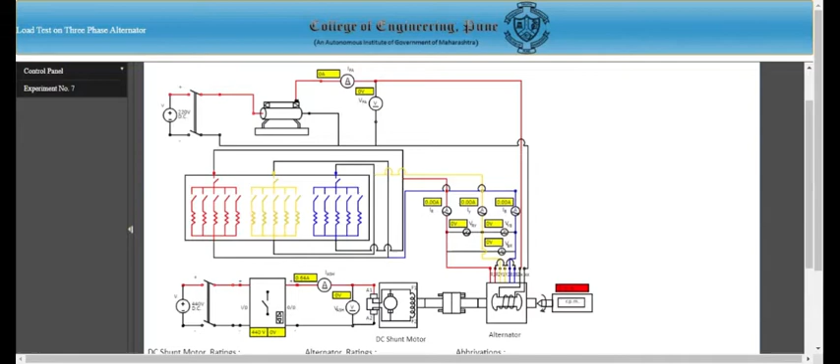This is the DC excitation system. There are two power supplies, one in the DC excitation system and another in the DC shunt motor. There is a rheostat to provide the field current to the rotor, and this is the DC ammeter and voltmeter to measure the field current and field voltage of the alternator. This is the AC ammeter and AC voltmeter to measure the line current and line voltage of the alternator, and this is the DC ammeter and voltmeter to measure the armature current and armature voltage of the DC shunt motor.

This is a setup of the resistive loads. So the first step is to close the double pole single throw switch connected to the DC shunt motor, and the power supply is used to increase the armature voltage of the DC shunt motor. The value of the armature voltage is increased gradually.

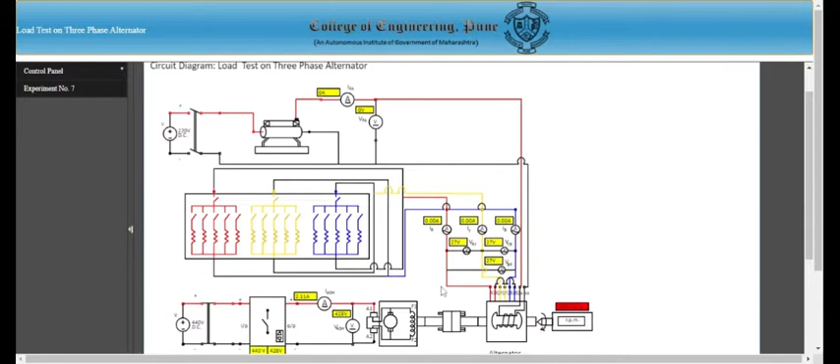After the desired speed is achieved, the DC excitation to the synchronous generator must be turned on. Before that, if we notice the voltmeter connected to the alternator to measure the line voltage, it measures a value of 27 volts instead of 0 volts. This 27 volts is due to the residual magnetism present inside the alternator.

So in the rotor field circuit, by using an external DC supply, the field winding is excited. A rheostat is connected in series with the field winding to control the flux, that is the current in the field winding. First, the double pole double throw switch is closed and the power supply is given to the rheostat.

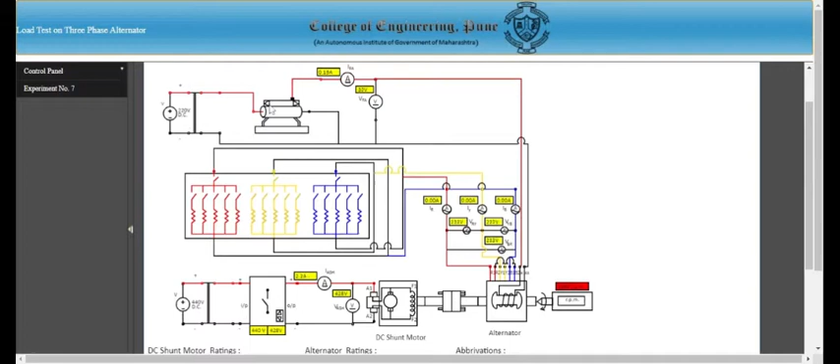After giving the DC supply to the field winding, the field current is adjusted in order to adjust the flux, so that the rated value of the terminal voltage of the alternator is attained. The value of the resistance is cut down to increase the value of the field current, because resistance is inversely proportional to current. The alternator rating of terminal voltage is 415 volts.

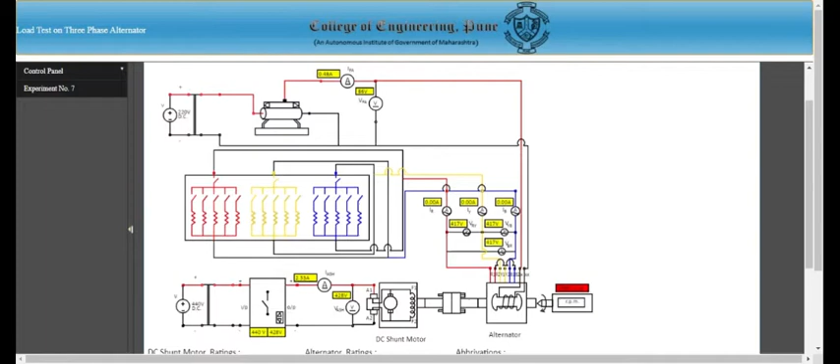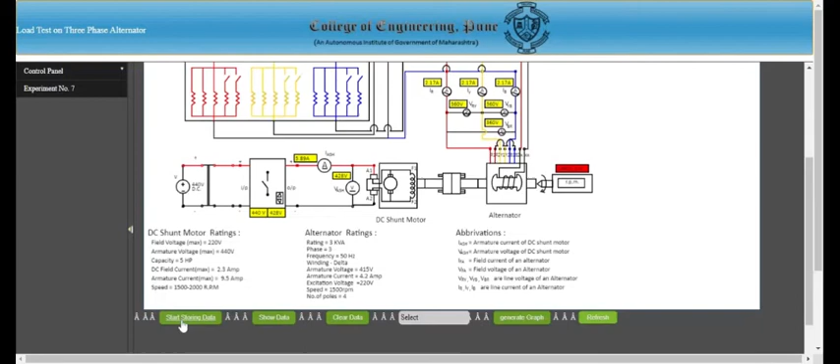Now DC excitation will be held constant throughout the experimentation. So to test the machine on load, we'll be applying loads from the resistive load bank. Each load, when applied, the data will be stored here. As we go on increasing the load, the terminal voltage of the three-phase alternator and the speed will also reduce.

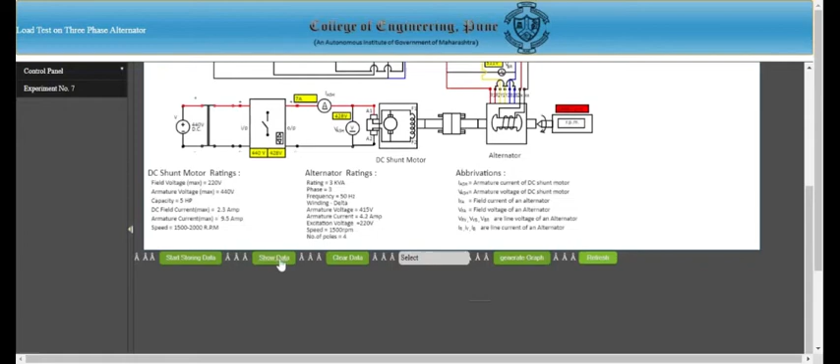So this is a three-phase alternator at full load condition. Now the data will be displayed here. The plotting of graphs against each parameter can be generated here.

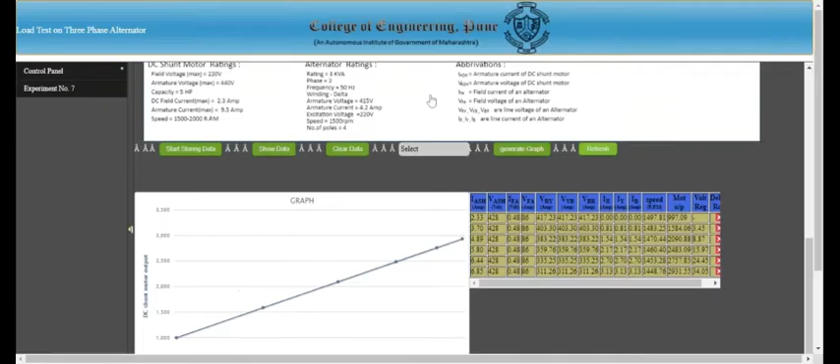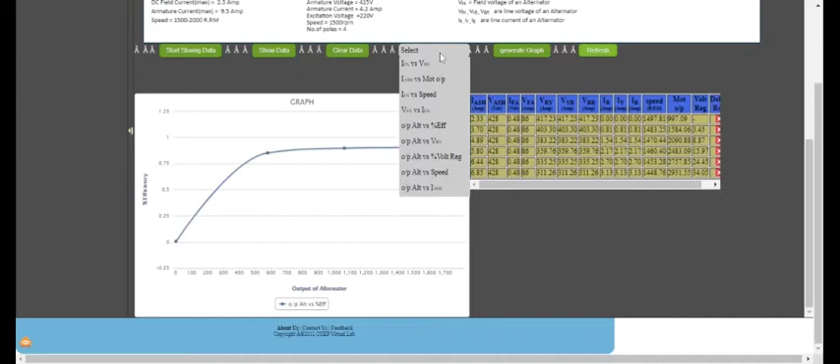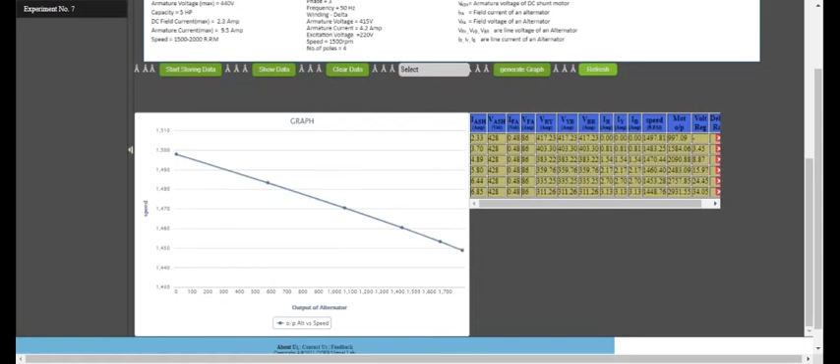This is the graph between the output of the alternator and the efficiency. This is the graph between the output of the alternator and the percentage voltage regulation of the alternator. This is the graph between the output of the alternator and the speed.

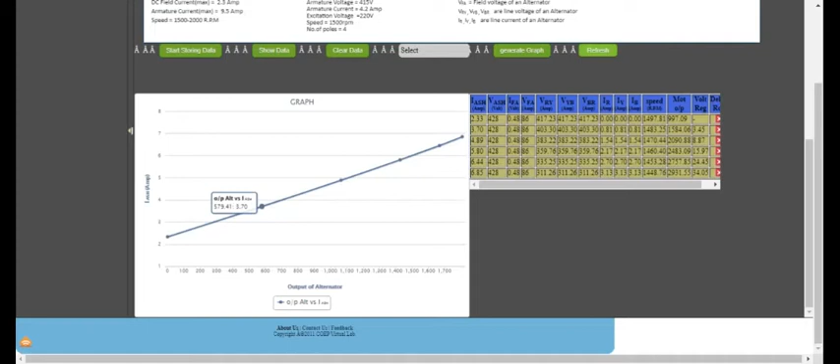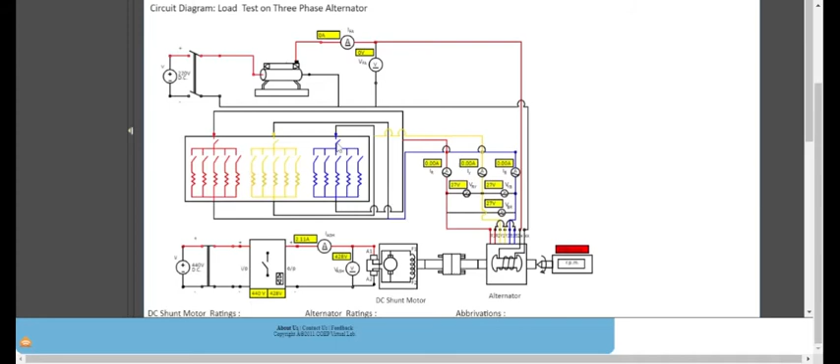Remove the field excitation of the synchronous alternator with the double pole double throw switch. Switch off the resistance from the circuits of the generator. Cut off the supply through the double pole single throw switch of the DC shunt motor after making all applied quantities zero.

As the load is increased, the DC input to the motor will also increase to bring back the speed of the alternator to the synchronous speed. Due to the voltage regulation effect, even though speed is restored, drooping characteristics are observed for terminal voltage against line current of the alternator.

Load test of an alternator provides information about the efficiency and the regulation. It is performed by driving the alternator at its rated speed and increasing the field excitation till the armature voltage reaches its rated value. Then increase the load on the alternator terminals. During this process, the alternator armature current will increase, and the terminal voltage will vary according to the type of load. By observing the input and output of an alternator at each load, we can calculate the corresponding efficiency and regulation.